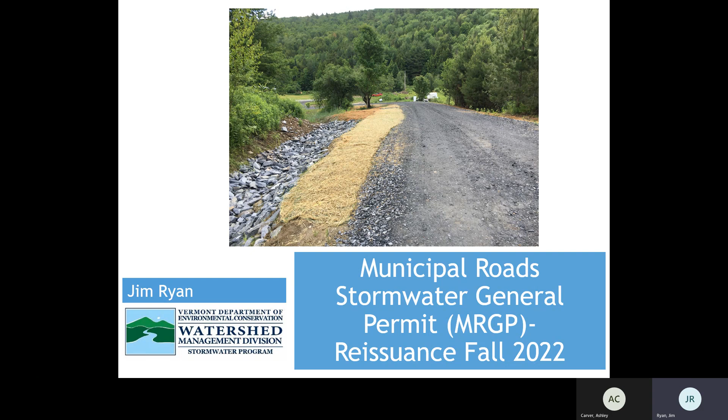Hello, this is Jim Ryan with Vermont DEC in the Stormwater Program, here to talk today about the Municipal Roads Stormwater General Permit being reissued this fall and into January 2023. And here we go.

The Municipal Roads Stormwater Permit was developed as part of Act 64, the Vermont Clean Water Act, which was passed in 2015. Over a 2-year period, Vermont DEC and stakeholder partners, including the League of Cities and Towns and regional planning commissions, DEC and VTrans staff and programs, developed the Municipal Roads Stormwater General Permit by holding core team meetings monthly for nearly 2 years in developing the first 5-year permit cycle, which was effective in January 2018.

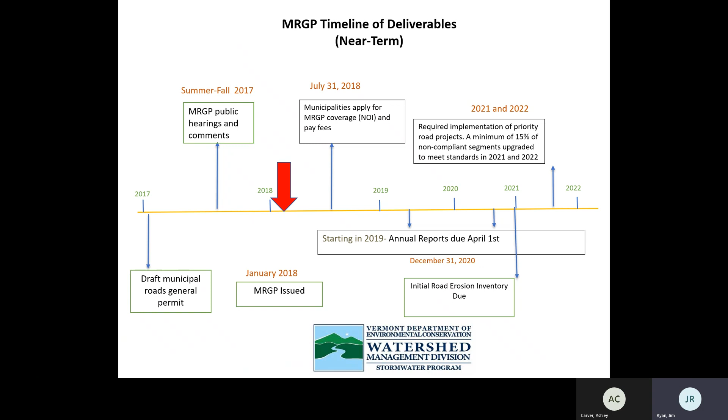Municipalities had to apply for coverage with a notice of intent, or NOI, and pay some fees. And the major deliverable in the first 5-year permit cycle was to develop a road erosion inventory of hydrologically connected road segments and begin bringing those road segments that were not in compliance up to the standards in the 2021-2022 field season.

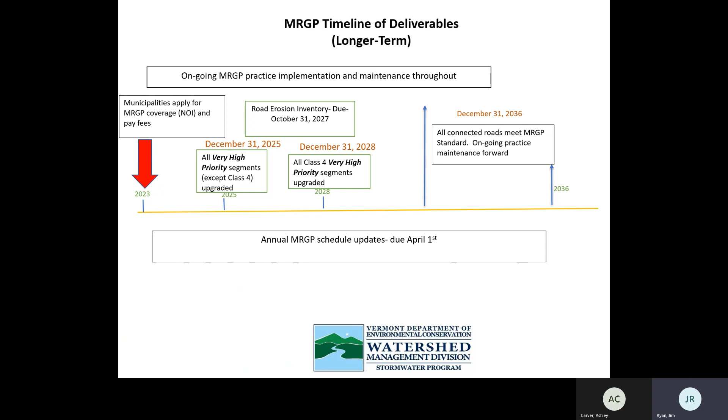We are currently at the end of the first 5-year permit cycle this fall of 2022, and we will be transitioning to the second 5-year permit cycle, which will begin in January of 2023. Some major deliverables for that second permit cycle will be to develop a second road erosion inventory. So one road erosion inventory is due each 5-year permit cycle, and that second road erosion inventory will be due October 31st, 2027. Additionally, towns will have to pay annual fees and also have an annual report due on April 1st.

A hydrologically connected road is one that's within 100 feet of a water resource; a municipal road that drains to or crosses or bisects a water resource; a municipal road segment that is within the DEC river corridor, which is delineated on the Agency of Natural Resources Atlas; and for closed drainage systems, a catch basin outfall or outlet within 500 feet of a water resource. Water resources include perennial streams, intermittent streams, those are streams that run for part of the year, wetlands, lakes, and ponds.

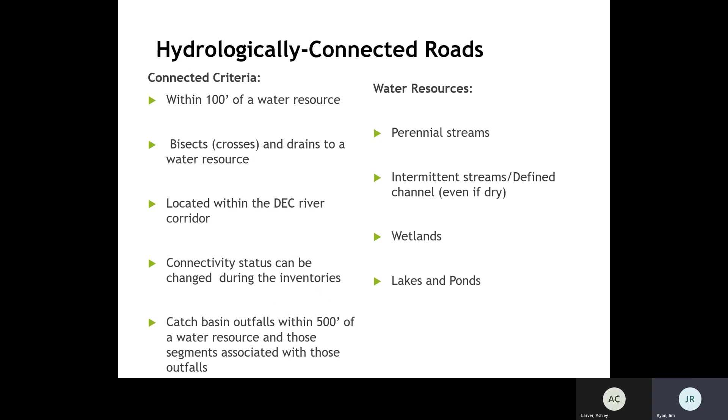During the road erosion inventory process or during updates to road segments, the connectivity status can change. Non-connected road segments are not part of this permit. We have approximately 55% average statewide, which varies from town to town, of connected road segments. So that's classes 1, 2, 3, and 4 that are in close proximity to water resources and therefore covered under the permit.

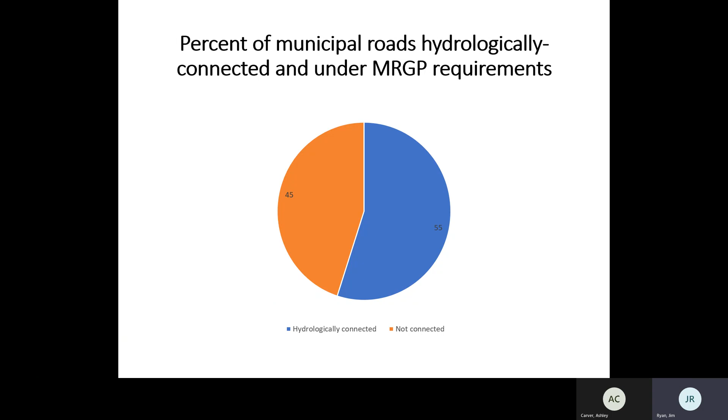This is a screenshot of the Agency of Natural Resources Atlas, the municipal roads theme or layer, and any colored segments. A road segment is 328 feet long, or 100 meters in length. Each road segment has a unique identification number, and each road erosion inventory determines the compliance of each road segment. The colors represent red being does not meet, or the worst score on the erosion inventory, to orange meaning partially meets, to green meaning fully meets, and yellow is not enough data to make the calculation.

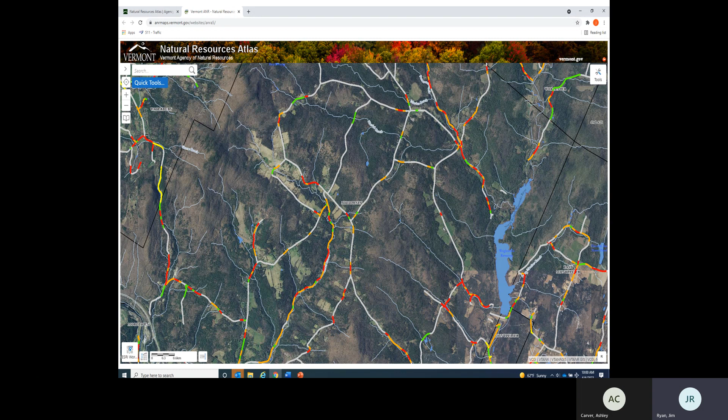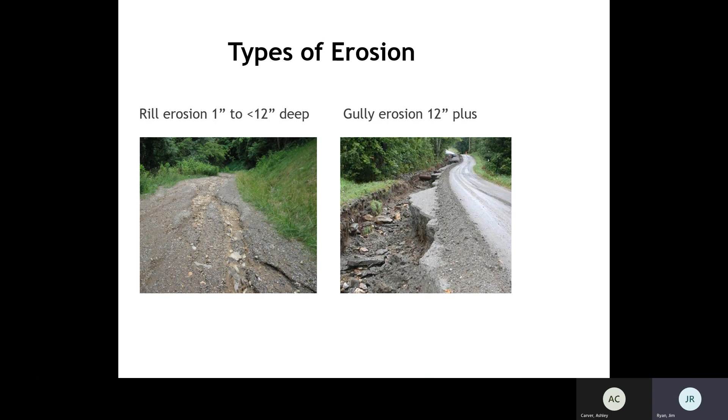The white segments are non-connected and therefore not under the permit, but you can see from the screen we have roads crossing streams or next to lakes. They come up with a color indicating they're connected. When we inventory roads, we look to determine if there's any erosion happening within the road cross-section. So what type of erosion, whether it's rill or shallow erosion, 1 inch to 12 inches deep, or gully erosion, a steeper, more severe erosion of 12 inches plus, and in which part of the road cross-section the erosion is taking place.

These are some typical questions that are asked for our open drainage roads, so those are roads that have ditches. Does your road have a good crown? Are the road shoulders lower than the travel lane? If no, do you have an adequate ditch? Is your ditch stone lined if 8% or higher slope? Is your ditch lined, stone lined, or have check dams or true cross culverts for road slopes within the 5 to 7.99% range? Are your ditches turned away from water or stable? Any road segment with a slope of less than 5% can be grass lined. Are your drainage, intermittent stream, and driveway culverts adequately sized and not eroding?

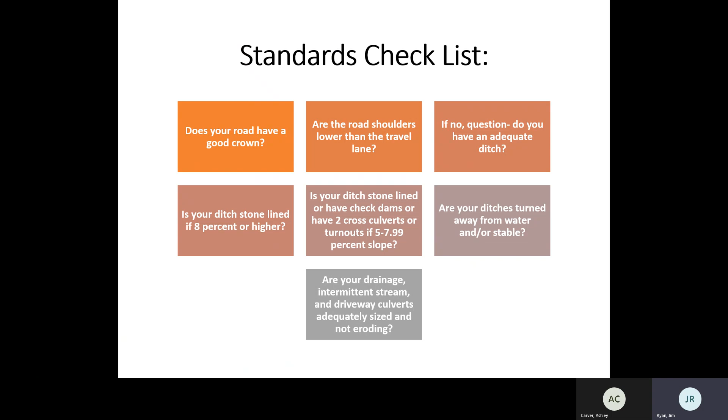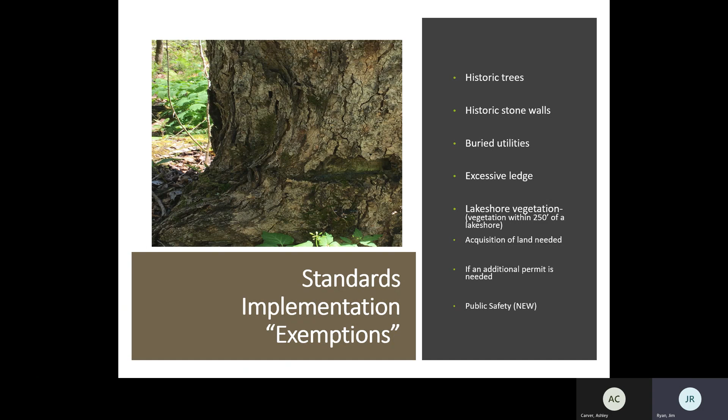In addition, if any DEC permit, such as a wetlands permit, lakeshore permit, or stream alteration permit, or a federal permit such as a FEMA or Army Corps of Engineers permit, is needed to put in any practices, the practice is exempt. And also something new in this permit cycle: any practice that would make the road travel lane unsafe, or for public safety, does not have to be installed.

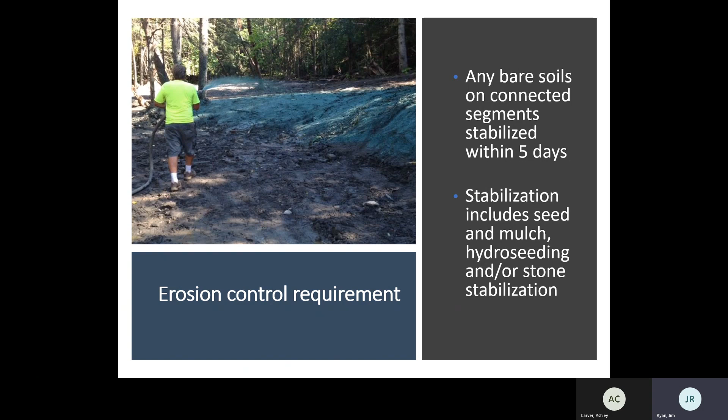This requirement is the same in the current permit as it is in the forthcoming next 5-year cycle. There's an erosion control requirement. Any bare soils on connected road segments need to be stabilized within 5 days of disturbance. Stabilization includes seed and mulch, hydroseeding, or stone stabilization. We see this in the fall, typically when towns are doing their ditch work, and we are requiring towns to stabilize those ditches with seed mulch or hydroseed or stone stabilization.

For the second 5-year permit cycle, that group has been meeting for nearly a year, once a month, and guiding this process again. And as I mentioned before, it's the same stakeholder group from the first permit cycle: various programs at VTrans, local roads and better roads program managers, DEC staff, regional planning commission staff and directors, and the Vermont League of Cities and Towns.

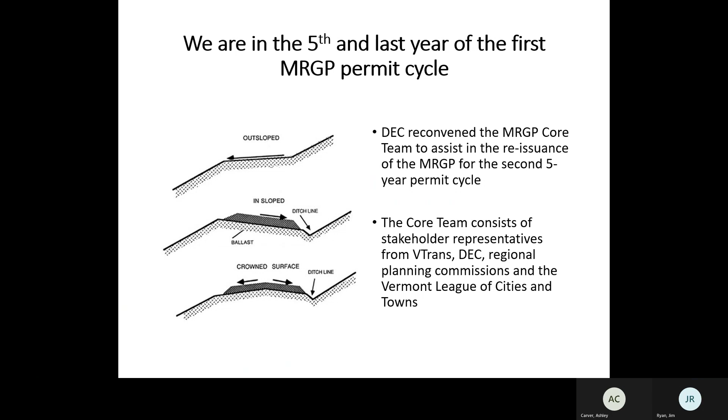The second 5-year permit cycle will run approximately January 26th of 2023 through January 26th of 2028. Towns will have to reapply for coverage under the new permit. That means filling out a notice of intent form and paying a processing and administrative fee totaling $640. New annual report forms, it's a 1-page form, will be due on April 1st of each year.

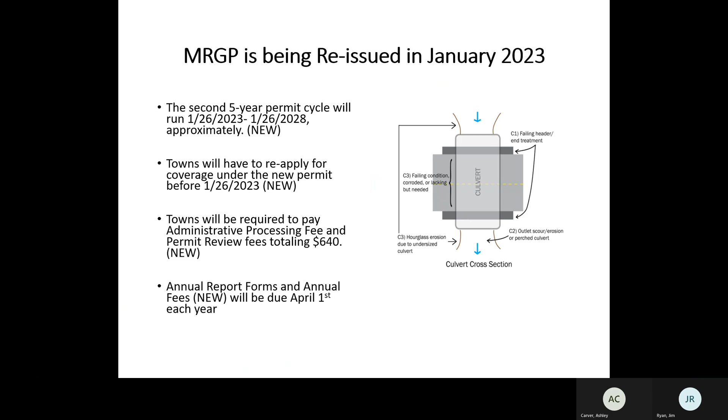There'll be a new road erosion inventory, REI, that needs to be completed for all connected roads by October of 2027. The road erosion inventories each permit cycle give DEC an idea if the practices that are being installed are working and are being maintained. There is a new road erosion inventory compliance scoring this permit round, and it'll be based on the percent of the road segment having the required practices in place, which is very similar to what we have in the current cycle.

But in addition to that, we'll be looking at the degree of erosion, rill or gully erosion at different parts of the road cross-section, and we will also factor in road slope. So a road that does not have the required practices in place, has severe or gully erosion occurring, and is on a steep slope, that will be our highest priority for upgrades to our new standards.

We have the same implementation requirement standard as we currently have. That's 7.5% of non-compliant segments need to be upgraded annually. Towns have the discretion of where those segments are upgraded throughout town as long as they meet the 7.5% requirement. And as part of the very high priority segments, 20% of those, the worst sites, if you will, from a water quality perspective, have to be included within that 7.5% per year.

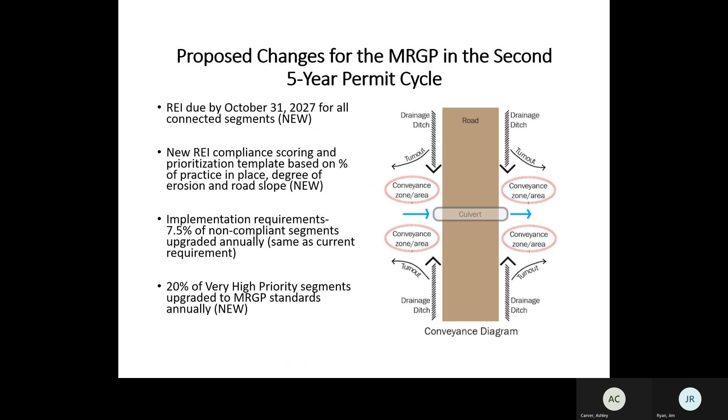Another new item is DEC may assess individual road segments ahead of the new road erosion inventory deadline when there's a serious potential road water quality threat. In other words, if DEC staff gets called out to look at a complaint about sedimentation from a municipal road entering a water resource, even if that's not the result of current town road construction, DEC may assess that segment or those segments contributing to the sedimentation.

If the DEC staff assesses those segments and they are scored as very high priority, the town will have 2 years upon notification from DEC to bring that segment or those segments up to the new standards. That's a new item, so we can target sites that are causing significant erosion and sedimentation to water resources.

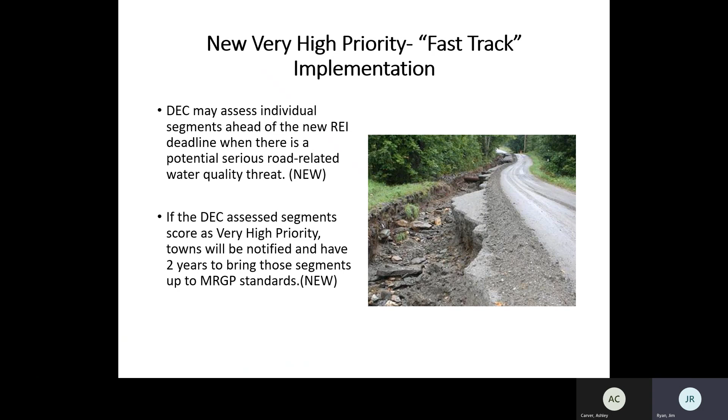Segment upgrades and annual reporting. Segments are documented by reassessing each individual segment. So out of the 7.5% of non-compliant segments, that minimum number that needs to be upgraded annually, towns have to reassess those individual segments to show DEC that they're upgrading non-compliant segments to the MRGP standards. They will use a DEC-developed road erosion inventory tool for that.

And any segments upgraded to fully meet status starting in the 2023 field season will not have to be reassessed as part of the townwide reassessment. So in other words, if towns are reporting 7.5% annually for several years before they complete their townwide inventory, they do not have to reassess the segments that they assessed starting in 2023.

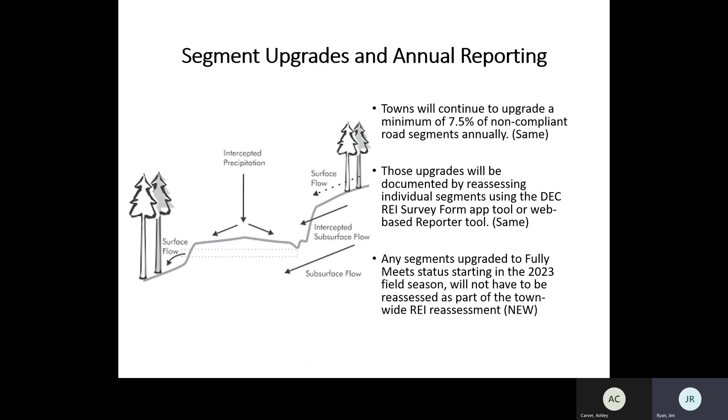The new road erosion inventory app tool: currently DEC and the Agency of Digital Services have developed an application on the Survey123 field form, and we'll be upgrading and updating that form to reflect the new scoring. The new DEC app will be required to be used by towns or any organization working on behalf of towns or consultants.

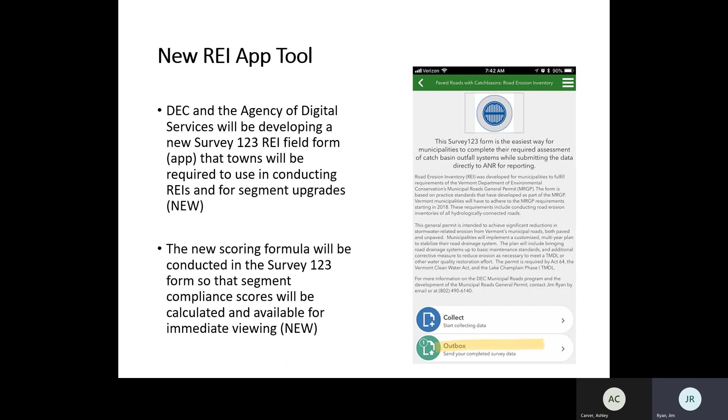In the past, DEC had allowed other organizations to use their own developed apps to conduct the road erosion inventories, but because the scoring will be part of the app itself and not done in the database, we're requiring the new DEC app tool be used starting in the 2023 field season.

As I mentioned, the new app will be ready in the spring of 2023. DEC and the Agency of Digital Services will be providing road erosion inventory training in early spring of 2023 for those entities that are assisting towns in their road erosion inventory, or towns themselves that would like to learn how to do their own inventories.

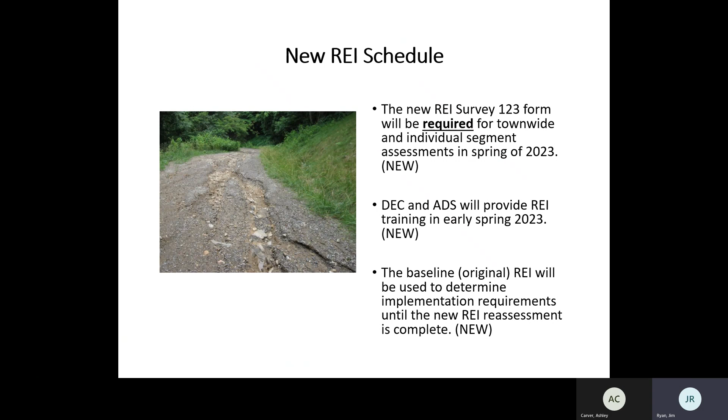The baseline, or the original road erosion inventory, which was completed in the first 5-year permit cycle, will be used to establish the implementation requirements until the new road erosion inventory is completed. Kind of a minor change for the new permit cycle: we're just changing the road type names.

Each road type has different standards, and the survey form will reflect that road type when the road erosion inventories are being conducted and ask different questions. So paved roads with curbs and catch basins will be closed drainage roads. Paved and gravel roads with open drainage systems will now be called open drainage roads. And the class 4 roads name will stay the same.

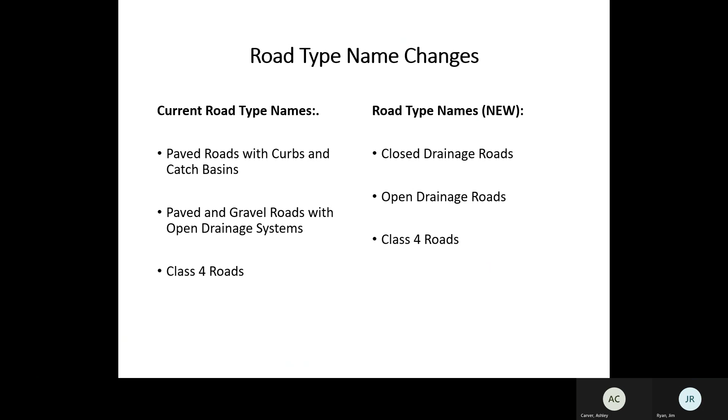One change to the standards that will be in the second permit cycle is for non-compliant intermittent stream crossings. So if we have an intermittent stream crossing that is failing because it is undersized, or it needs to be replaced, or a new intermittent stream culvert that's being put in, we are requiring the active channel width. Currently in the original 5-year permit cycle, we only recommend that, but we will now be requiring that.

It's about 75% of the bank full width, as indicated in the graphic. It's generally the scour line or vegetative line in the channel. It's relatively easy to measure in the field with some training that we will conduct as part of the road erosion inventory training. And that's only for non-compliant intermittent stream crossings. Stone headers or head walls and outlet stabilization will still be required for road slopes 5% or greater. That's the same as they currently are.

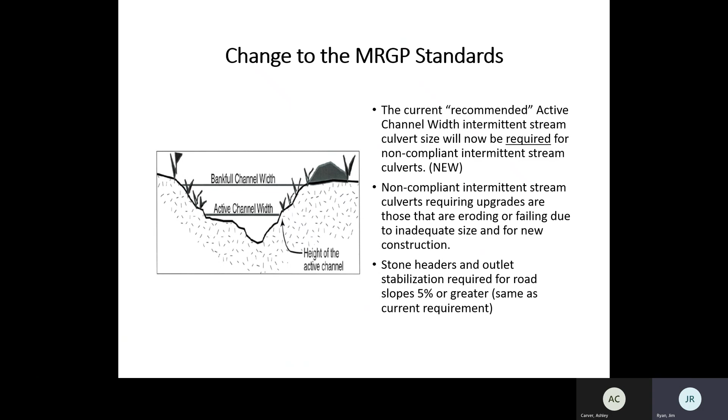So in the field, we often ask, what type of culvert is it that you're looking at? And we put the culverts into 3 different baskets. We have drainage, cross culverts, and also in that basket are driveway culverts. There's no defined channel below the structure. We have a 15-inch minimum diameter for driveway culverts, 18-inch diameter recommended. And for cross culverts that are conveying road drainage from one side of the road to the other, we have an 18-inch minimum.

For intermittent streams, which have a defined channel bed but dry up for several months most years, we are requiring the active channel width. And perennial streams that run year round will require the bank full width, which will require a DEC stream alteration permit, the same as it currently is.

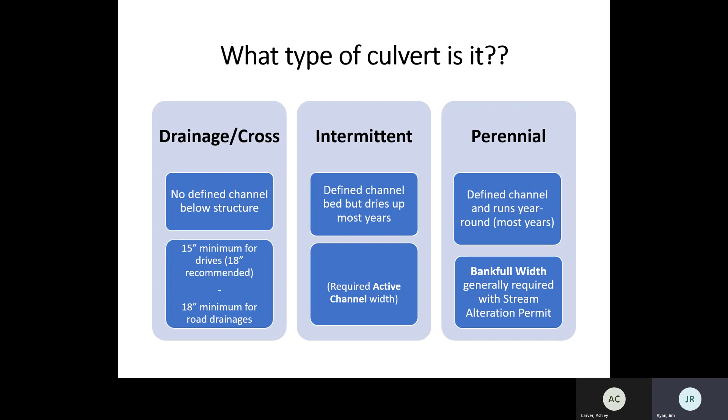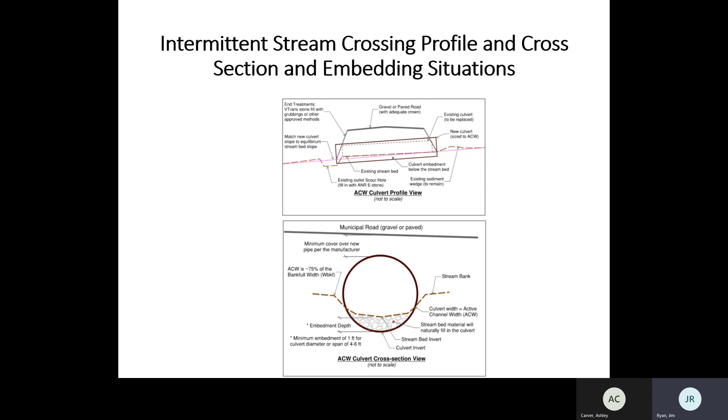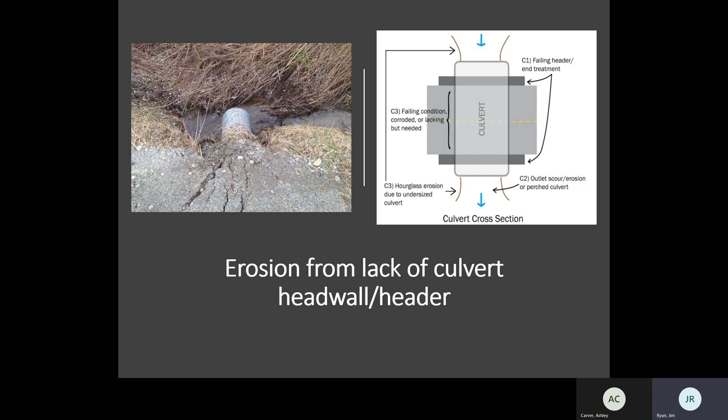It's a graphic, so most of the practices in the municipal roads general permit will refer to the VTrans Better Roads Manual that VTrans and DEC jointly developed back in 2019. So all of the practices that are in the permit have these details in the VTrans Better Roads Manual, including the stone apron at the culvert outlet.

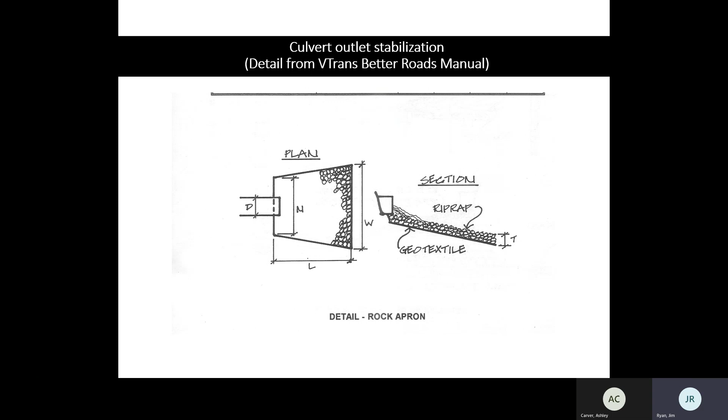Okay, some information about our public meetings. There'll be a comment responsiveness report prepared after the public comment period ends on October 24th. And the permit will be reissued in November of this year, 2022. Towns will then begin applying for coverage, fill out the notice of intent form, and pay the fees mentioned earlier before January 26th.

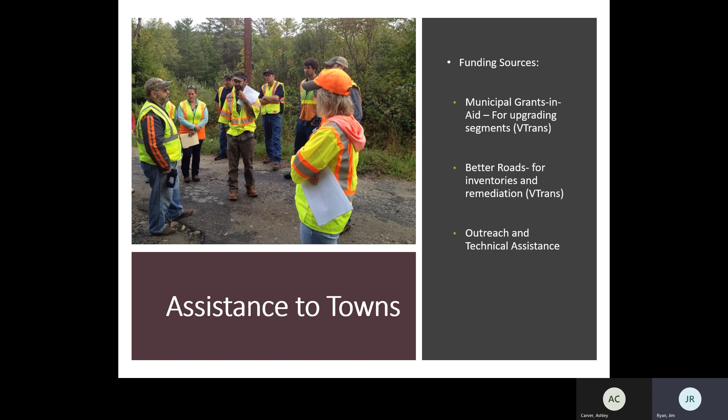There continue to be funding sources for both completing the road erosion inventory through Better Roads Category A grants, and for implementation, the Better Roads Category B grant and the Municipal Grants-in-Aid Program for upgrading segments to meet the standard, which are administered by VTrans. And VTrans staff and DEC staff are available to provide outreach and technical assistance.

And DEC will continue our partnership with VTrans Local Roads in holding both virtual and in-person road roundtable trainings where we have a discussion on how to install various practices, what equipment to use. It's kind of an interactive discussion and covers grading and crowning, berm removal, grass and stone line ditch installation, culvert installation and sizing, and also covers the municipal roads general permit and grant funding sources.